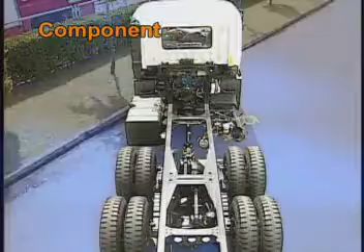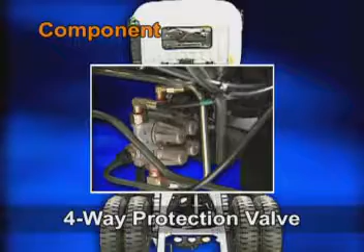Let's begin with the system structure of the air over hydraulic brake. This system consists of an air compressor, air dryer, air tank, dual brake valve, quick release valve, parking brake valve, four-way protection valve, air master, and wheel cylinder.

The air over hydraulic brake system is a hydraulic dual operating system. By operating the brake pedal, air pressure is controlled. The air master converts the air pressure controlled by the brake pedal and operates the wheel cylinder with hydraulic pressure.

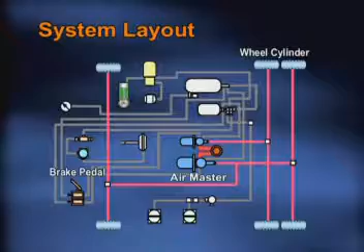Now, let's take a look at the circuit of the air over hydraulic brake system. An air compressor installed in the engine generates compressed air. Compressed air is filtered by the air dryer and stored in the air tank, clean and dry.

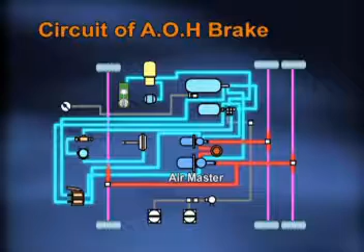When the driver presses the brake pedal, the dual brake valve is activated. As the circuit opens by the dual brake valve line, compressed air in the relay valve, transferred from the air tank, is supplied to the air master. When the air master operates by the compressed air, hydraulic pressure generates to be supplied to the wheel cylinder.

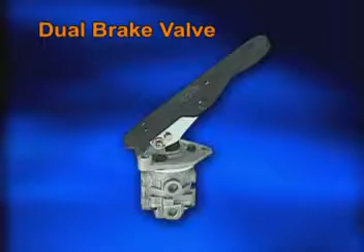The following are operations of each component used in the air over hydraulic brake system. The first is the dual brake valve. It is installed together with the floor brake pedal on the driver's side.

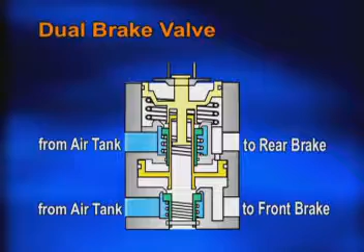In the dual brake valve, brake force controlling the valve by pressing the pedal consists of two circuits, primary and secondary, each operated individually. In general, the primary and secondary circuits are linked to the rear wheels and front wheels, respectively. This is an engineering deliberation to obtain braking force even when one of the circuits fails.

The dual brake valve consists of a supply port, delivery port, and exhaust port. The supply port and delivery port are connected to the air tank and relay valve, respectively, and the exhaust port is open to the air.

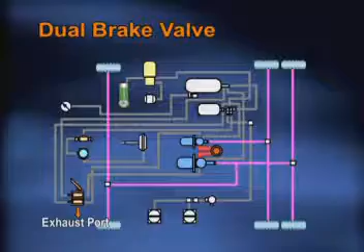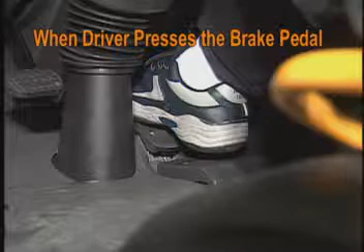This time, I would like to explain the case when the driver presses the brake pedal. The primary circuit operates as follows: when the brake is pressed, force applied in the plunger pushes the primary piston, and the primary piston touches the inlet valve seat. Then the exhaust port is closed and the inlet valve is opened, so air from the tank is delivered to the relay valve in the rear wheels.

When air is transferred to the primary circuit, air pressure is applied to the upper part of the piston through the pilot hole in the upper body. The relay piston closes the exhaust port and opens the inlet valve by touching the exhaust valve seat in the secondary circuit. Then air is supplied to the relay valve in the front wheel from the air tank.

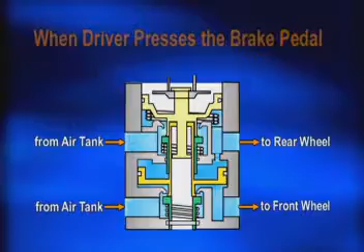Now let's deal with the case when the pedal is released. When the driver releases the brake pedal, mechanical force to the pedal disappears in the primary circuit, and then air pressure in the valve and spring force open the exhaust valve with the primary piston. Then air flowing to the exit is discharged through the exhaust port. Likewise, in the secondary circuit, the relay piston opens the exhaust valve, and air flowing to the exit is discharged through the exhaust port.

The following is an explanation for the case when the primary circuit line is leaking or damaged. If the pedal is pressed when the supply pressure of the primary circuit has no pressure for any reason, the primary piston delivers mechanical force to the relay piston to open the inlet valve. If the pedal is pressed under supply pressure disconnection of the secondary circuit when that line is leaking or damaged, the primary circuit operates only as explained above.

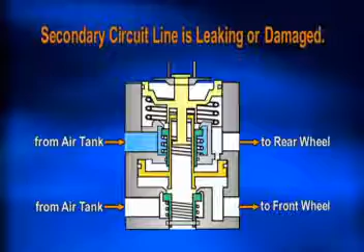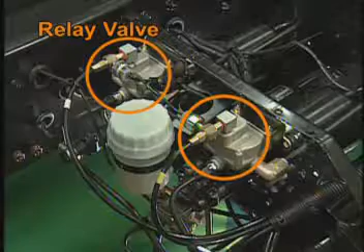Now let's go to the relay valve. Air from the air tank stays in the relay valve at all times. When the driver applies the brake pedal, air supplied from the brake valve transmits the signal to the relay valve. Then air in the relay valve flows to the air master to operate. A relay valve is installed to perform accurate braking without time lag to meet the driver's intention.

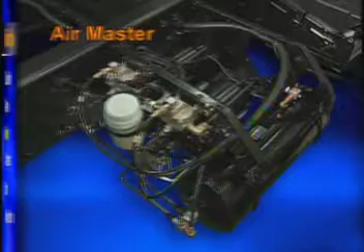Air supplied from the air tank by the relay valve pushes the piston plate in the air master chamber. When the power piston pushes the hydraulic piston, hydraulic pressure generates at the hydraulic piston connected to the oil reservoir tank. Hydraulic pressure expands the wheel cylinder installed in the drum. Then the lining expands inside the drum and braking force generates by the friction between lining and drum.

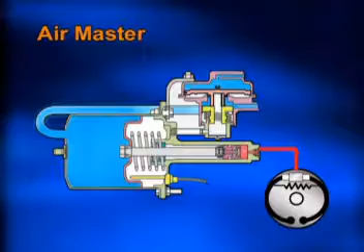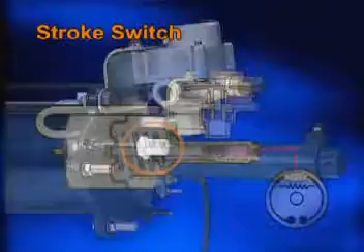Let's take a look at the stroke switch this time. If oil leaks in the hydraulic line, or pressure drops due to certain problems, or the lining is worn out, the push rod stroke increases. Since this influences brake performance seriously, the warning lamp warns the driver. The stroke switch operates the warning lamp.

If oil leaks or the lining is worn out excessively, the stroke increases as shown in the figure from the normal stroke. Then the piston plate touches the stroke switch and the warning lamp turns on.

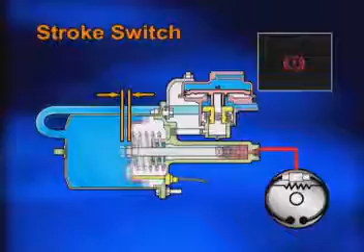The engine operates the air compressor. While the engine is running, compressed air is generated continuously by the up and down movement of the piston. Engine oil is used for piston lubrication. Timing should be set when the air compressor is installed in case of mechanical engine.

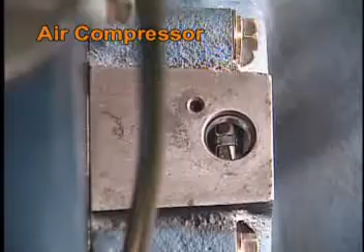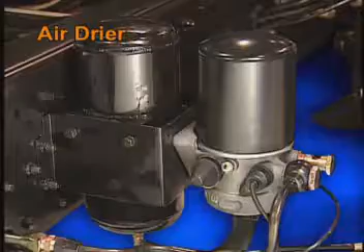Let's take a look at the air dryer. Since the AOH type, or full air type, uses compressed air, the air dryer performs very important functions. Compressed air by the air compressor generates high temperature. Moisture generates in the compressed air passing through the air line. Since this moisture causes corrosion, moisture should be eliminated. The air dryer eliminates this moisture.

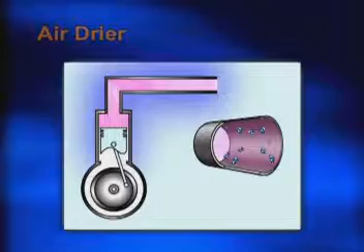Compressed air generated in the air compressor passes through the annular filter, the first filter, by way of the air dryer inlet. Then engine oil and impurities are filtered. Moisture is eliminated as the air passes through the desiccant. The filtered air is charged to the maximum pressure of the air tank by way of a check valve.

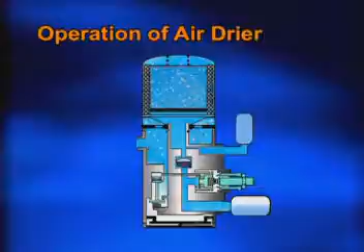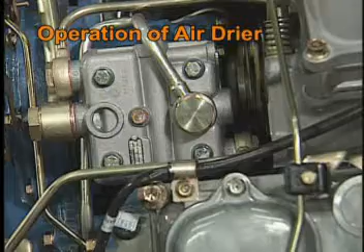If the engine is running or the brake or other accessory equipment are not used, the internal pressure of the system reaches the maximum pressure set in advance. This pressure is thus called cutout pressure.

When the pressure of the compressed air reaches the cutout pressure, the governor piston, supported by the double spring, moves to the right and the passage opens. Compressed air is transferred to the purge piston to move the purge piston downward.

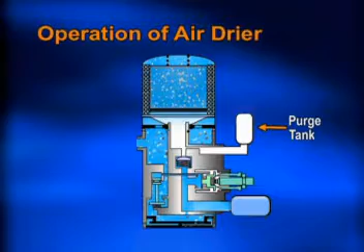When the passage opens that was shut by the purge piston, air generated from the air compressor is discharged. Then air charged in the purge tank moves backwards and cleans the filter and removes the impurities stuck in the desiccant. When the brake or other accessory equipment are used, air charged in the air tank is consumed and air pressure reduces to the minimum pressure set in advance.

Air pressure reduces to the minimum pressure set in advance. This pressure is thus called cut-in pressure.

If the system pressure drops down to the cut-in pressure, the governor piston is closed. Then pressure applied to the upper purge piston reduces and the air passage gets closed. Therefore, compressed air is charged.

Cutout pressure and cut-in pressure can be set. Though they are set in advance when they are manufactured at the factory, they should not be set in their own way. If set improperly, it may result in functional deterioration or serious part damage.

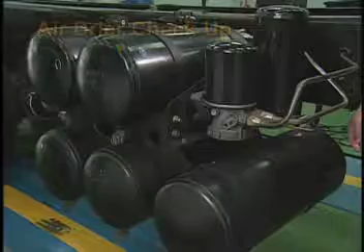Now let's turn to the air dryer checkup. The filter cartridge at the upper air dryer should be replaced periodically. Replacement interval is 1 year or 50,000 kilometers, whichever comes first. However, the replacement interval may be shortened under severe conditions, so frequent checkups are required in that case.

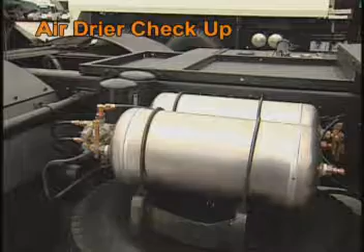To check the air dryer, open the drain cock valve manually, installed at the bottom side of the air tank, to see if it drains moisture or engine oil excessively. If the drain is excessive, replace the filter cartridge.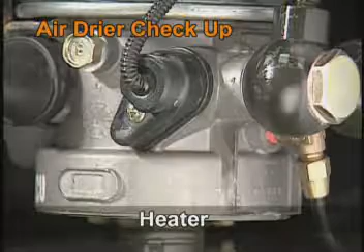A heater is installed in the air dryer to prevent freezing in winter, which operates automatically depending on the ambient temperature. It turns on at 7 plus or minus 6 degrees centigrade and turns off at 29 plus or minus 3.5 degrees centigrade automatically. To check the heater, touch the air dryer body by hand when the ambient temperature is low. If it's warm, it's normal.

Otherwise, replace the air dryer. If the supply port of the air dryer contains much engine oil, the filter cartridge desiccant is polluted and the desiccating function is lowered conspicuously.

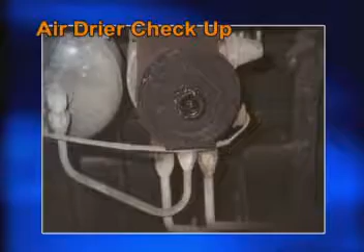Then, the filter cartridge should be replaced. If engine oil keeps draining even after the replacement, check the air compressor because it means oil leaks from the air compressor to the air dryer. Engine oil, lubricant, flows into the air line due to some specific internal problem of the air compressor.

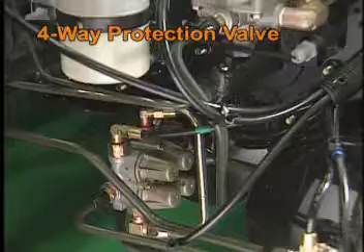The four-way protection valve shuts the airflow until the air pressure reaches the preset level. This is the safety functioning equipment of the brake system, which assures the braking force even when air pressure drops due to some reasons such as excessive use of accessory equipment or others.

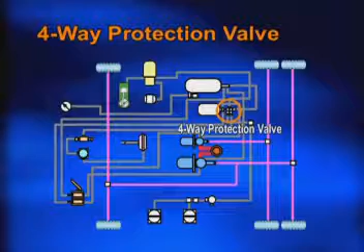This equipment, installed between the main air tank and the accessory tank, opens the air passage so that the air flows to the accessory air tank through the delivery port when the main air tank pressure reaches the preset level.

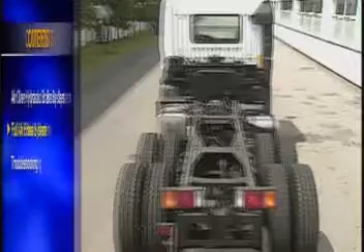We've learned about the AOH system so far. Now, let's learn about the full air brake system. This system operates as follows. The full air brake system uses compressed air only. Most components are shared with the air-over-hydraulic brake system.

The R12 relay valve, R14 double check valve and relay valve, spring brake chamber, and slack adjuster are unique components of the full air brake system.

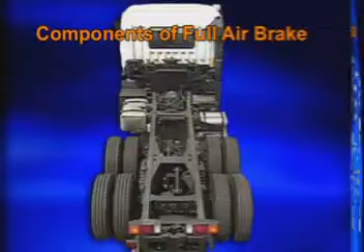Now, let me explain the layout of the full air brake system. Compressed air is generated in the air compressor installed in the engine. Compressed air is filtered by the air dryer and stored in the air tank as clean and dry.

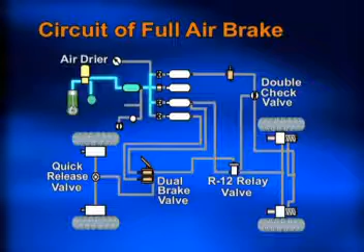When the air passage inside the R12 relay valve is opened, compressed air inside the R12 relay valve is transferred to the brake chamber. If the chamber is filled with air, the pressure pushes the rod to rotate the S-cam shaft, and accordingly, the brake shoe expands and brake force is generated through friction with the drum.

I'd like to explain the valves used in the full air brake system one by one. The first one is the relay valve. The relay valve mainly controls the air to the rear wheel brake chamber in the full air brake.

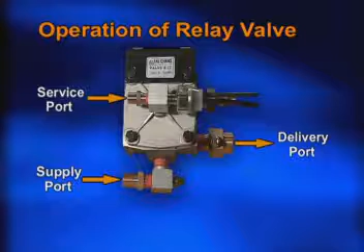The relay valve consists of a supply port, delivery port, service port, and exhaust port. Each port is connected to the air tank, brake chamber, dual brake valve, and atmosphere. When the driver presses the brake pedal, air goes to the service port connected to the dual brake valve.

When air pressure is applied to the upper part of the relay piston, it moves downward and the exhaust port closes and the inlet valve opens to be connected to the tank. So the air pressure flows to the delivery port instantly.

When the driver releases the brake pedal, signal pressure supplied to the service port is removed and force applied to the upper part of the relay piston disappears. When the force applied to the upper part of the relay piston is removed, the relay piston rises rapidly by the force applied to the lower part of the relay piston, and the inlet valve closes and the exhaust port opens. Then, air flowing to the brake chamber through the delivery port releases through the exhaust port.

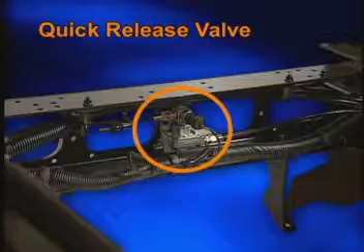The quick release valve is installed between the dual brake valve and the front brake chamber. The quick release valve consists of a supply port and delivery port. The supply port is connected to the delivery port of the dual brake valve, and the delivery port is connected to the front brake chamber.

When the driver presses the brake pedal, air is supplied to the supply port from the dual brake valve. Then, the diaphragm moves downward to shut the exhaust seat, and air is supplied to the brake chamber through the delivery port.

When the brake pedal is released, air flowing to the exit of the dual brake valve is discharged to the exhaust port of the dual brake valve, and the air pressure applied to the supply port of the quick release valve disappears.

Then, pressure applied to the upper diaphragm disappears, and air pressure is applied backward to move the diaphragm upward, which used to flow to the exit. The air is discharged through the exhaust port, which has been supplied to the brake chamber.

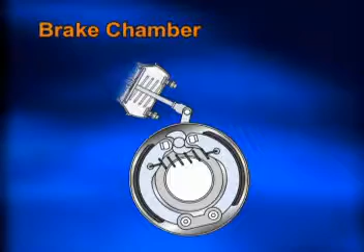The brake chamber in the air brake system receives compressed air and pushes the connected slack adjuster. The slack adjuster turns the cam to expand the shoe, and braking force is obtained. To release the braking force, the compressed air in the brake chamber is discharged into the air. Then the force pushing the push rod disappears, and it returns by the force of the return spring.

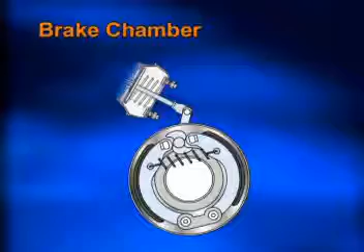When the driver presses the button, the valve opens and the air that flowed from the supply port is supplied to the spring chamber through the delivery port. Therefore, parking is released by compressing the power spring.

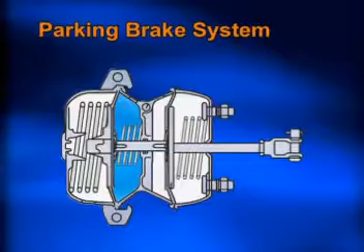While operating, the power spring expands by the discharging air and the parking brake is engaged. When the air pressure is weaker than the spring force built in the valve due to a system failure, parking is engaged automatically without any driver operation.

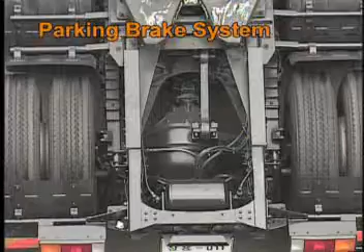Spring chambers are mainly installed on the driving wheels. Besides, they're installed with the brake chamber to allow engaging or release of the parking brake by driver operation.

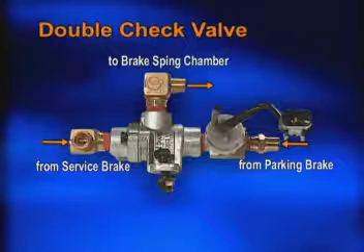The double check valve functions to determine airflow by selecting the higher pressure between the two supply lines. In the case when the brake pedal is depressed while the parking is applied, the pressure in the spring chamber is removed and the power spring is expanded while parking is applied.

In other words, the other side port of the double check valve connected to the parking brake line is free from pressure. If the brake pedal is pressed, the pressure from the relay valve is transferred to the other port of the double check valve. Therefore, the piston in the double check valve is pressed and shuts the port in the parking line.

Air pressure from the relay valve is supplied to the spring chamber to release the parking and is also applied to the brake chamber simultaneously. Therefore, the load by the double operation is prevented to protect the system.

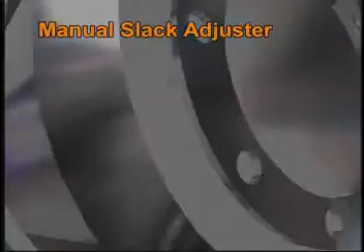A gap between the brake lining and drum grows as they're used. Therefore, a relevant gap should be maintained through periodic adjustment, and the lining gap is adjusted by the slack adjuster in the full air brake system.

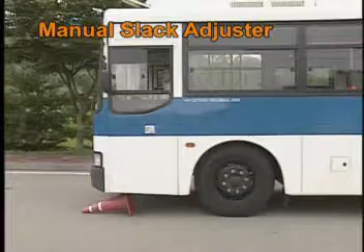Unless properly adjusted periodically, the lining gap grows excessively. Then braking performance lowers due to delayed chamber stroke when braking. Therefore, the brake pulls.

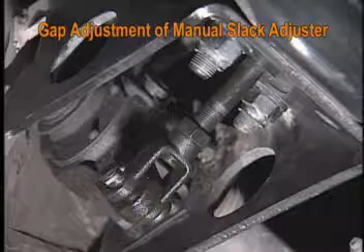Let me explain the gap adjustment of the vehicle installed with the manual slack adjuster. First of all, adhere the slack adjuster closely by the worm screw until the brake shoe does not move any longer. Then press the brake pedal fully. Unscrew the worm screw by adjusting the stroke of the brake chamber push rod to be front 25 millimeters and rear 30 millimeters.

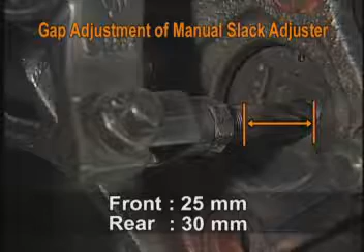The following are advantages of the automatic slack adjuster. First of all, the lining gap is maintained properly automatically, and stable braking performance is assured by keeping the proper chamber stroke all the time.

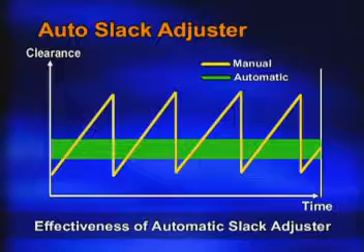Since there's no need to adjust the lining gap until complete wear, maintenance time is reduced.

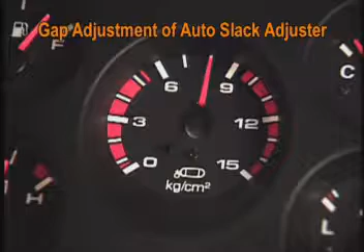The installation and lining adjustment of the auto slack adjuster are as follows. The procedure is as follows: keep the air pressure in the tank at 6 kilograms per square centimeter, release the parking brake, apply grease.

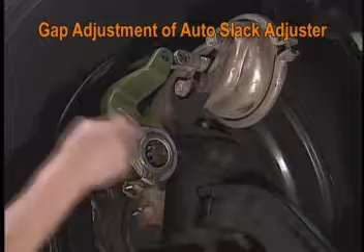Install the auto slack adjuster. Rotate the auto slack adjuster clockwise and align the slack adjuster and push rod of the brake chamber. Install the pin. Install the washer and key. Push the control arm of the auto slack adjuster in the arrow direction until it touches the internal stopper of the auto slack adjuster. Fix the control unit to the bracket.

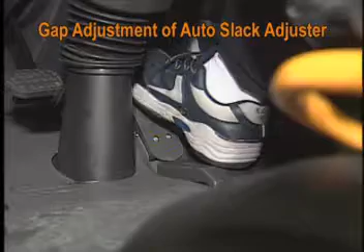Rotate the adjusting screw on touch lining with drum, then rotate the adjusting screw 3/4 in the reverse direction. Press the brake pedal 20 times to keep the appropriate clearance.

Now I'd like to explain troubleshooting of the air brake system. Since every function of the parts is very sensitive, requiring air tightness, they should be kept in mind when maintaining the vehicle.

Contents to be kept are as follows: remove any possibility of impurities flowing into the valves, check the air dryer, pipe, connector and air tank inside periodically, apply the specified torque when plumbing the air pipes, eliminate impurities when reassembling, and tags should be attached.

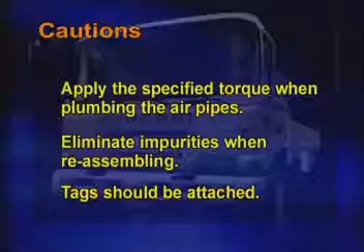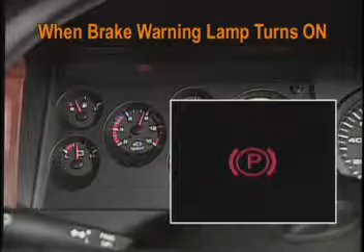There are 3 types of warning lamps related to braking: the parking brake operation lamp, which turns on when the parking brake is applied, and the brake warning lamp, which turns on when trouble occurs in the brake system.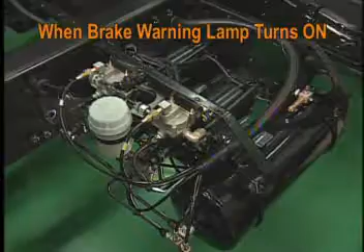The warning lamp may also turn on due to the air master stroke detector from excessive lining gap, or when the oil quantity in the reservoir tank drops due to oil leakage of the brake system, in the case of the AOH type.

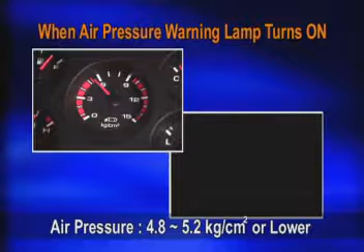Next, the air pressure warning lamp turns on when the pressure of the air tank for the brake system drops to or below 4.8 to 5.2 kilograms per square centimeter, because braking performance may be lowered by the air pressure drop.

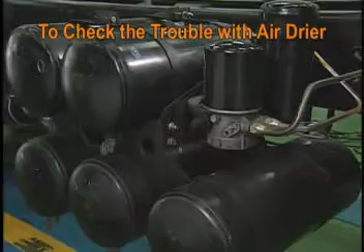System check of the air dryer. The air dryer cartridge should be replaced at an interval of 12 months or 50,000 kilometers driving under normal conditions. If an air dryer fails, the following may occur.

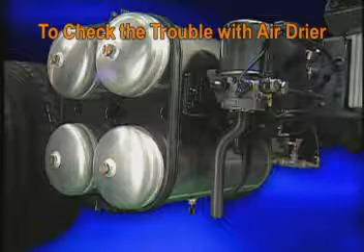When the air tank discharges water or moisture, check to see if the cartridge is polluted, or the cartridge replacement period is exceeded, or desiccation is deteriorated due to the temperature rise of the air tank.

In this case, check to see if any heat radiating object is present near the tank. Remaining condensed water may discharge for about 3 weeks even when the cartridge is replaced, so check the system again after 3 weeks.

If the air dryer body is hot while the vehicle is stopped under a temperature of 13 degrees, the heater is assumed to be in operation due to wrong power connection. If the dryer is freezing, the heater may have an open circuit, or the heater operation is poor. In this case, the air dryer assembly should be replaced.

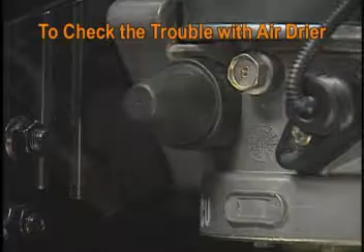Air pressure is purged at the cutout pressure and maintained under the pressure. In this case, check the leakage of the system line. When compressed air leaks out, the governor setting is misadjusted.

Air pressure drops to 0 bar gradually after the vehicle stops. In this case, check the system for leakage. If the air pressure dropping time is more than 13 hours, it's assumed to be normal.

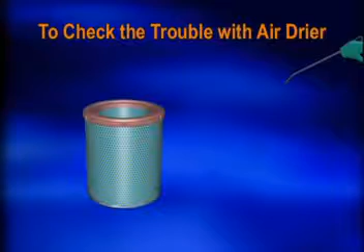When the air tank contains engine oil, it may have flowed in due to compressor failure. A poor air cleaner may cause compressor failure by allowing the inflow of foreign material into the compressor.

Now, let's review the troubles due to wrong installation of the auto slack adjuster. The auto slack adjuster should be installed by being pushed in the arrow direction as described above. If this is not done, lining burn, early wear,

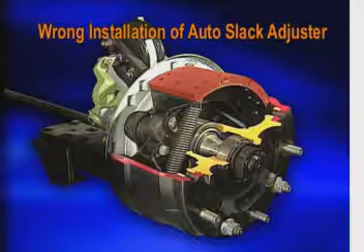drum overheating, or tire damage by the heat in serious cases may be caused. In addition, the control arm may be damaged due to abnormal operation.

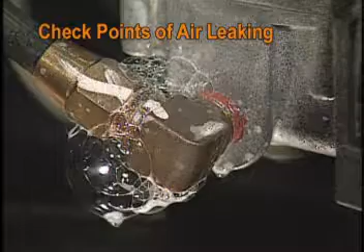Leaking points of the system are as follows. Though the R12 relay valve is less likely to have air leakage due to part failure, its frequent replacement should be assumed as valve leakage. If the R12 relay valve is suspected, check for leaks at the seal or connecting points due to inflow of impurities.

In the case of the dual brake valve, the internal return spring may corrode due to poor desiccation of the air dryer, causing poor operation of the dual brake valve. Besides, impurities due to rust may be transferred to each part through the air line, causing seal damage around the connecting points, where air may leak.

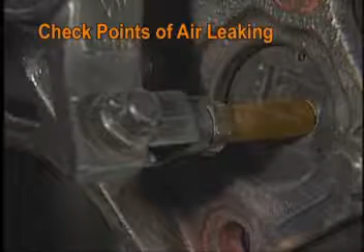In the case of the spring chamber, soil or dust can flow into the chamber through the operating points of the chamber push rod, and they may damage the diaphragm, at which time air may leak.

Finally, let me explain the causes for early lining wear. There are several causes for early lining wear and brake performance reduction after lining adjustments, such as air leaks, oil leaks, poor gap adjustment, or wrong installation of the auto slack adjuster.

We have learned about the brake system of medium-sized or large buses and trucks so far. The brake system is one of the most important safety devices. Your thorough understanding of the brake system is necessary for perfect maintenance. Hyundai Motor Company has been doing its best to promote effective maintenance. We will continue to do our best to support your maintenance activities. Thank you.